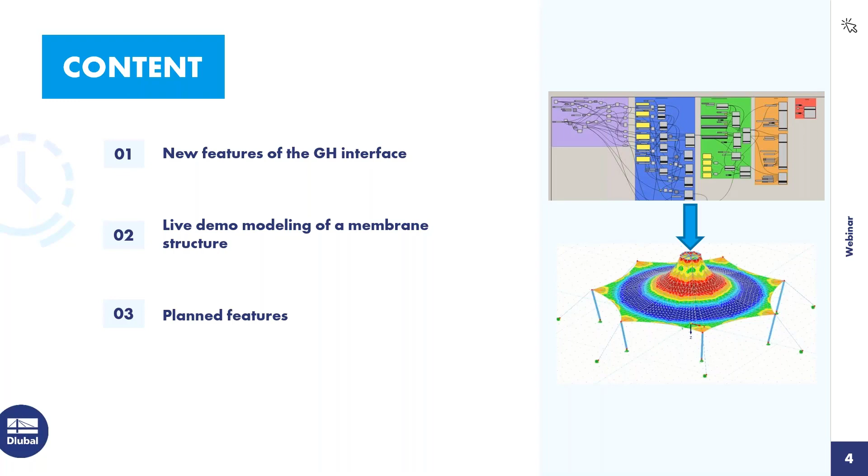All right, then let's switch into the first topic, the new features of the Grasshopper interface. Again, I listed them here in a PowerPoint. The first new feature is that we can create new cross-sections via the cross-section values. So we extended this component that you can see here on the picture with the information under more, so you can define a new cross-section now via the cross-section values.

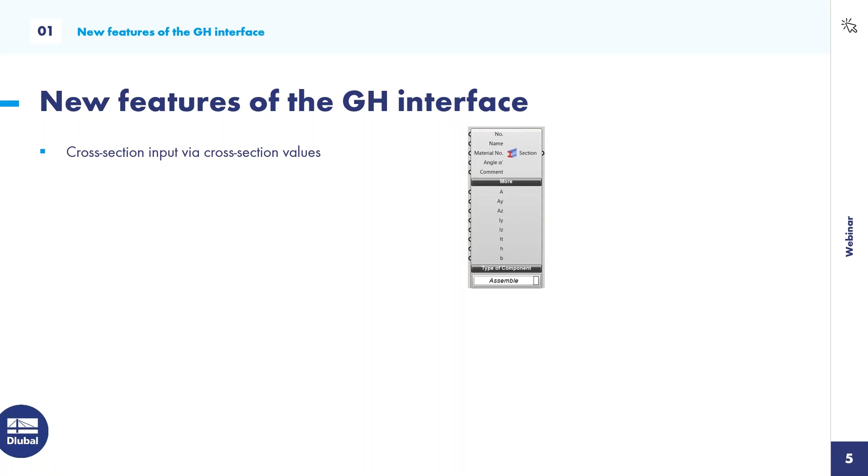The next thing that we optimized or implemented is non-linearities for node and line supports, as well as for member hinges. So now we can also control the non-linearities in these elements. Not all of them, I have to say. The diagram, the partial activity options, they have not been implemented here. They would require much more input options, and therefore we support now only the simple non-linearities.

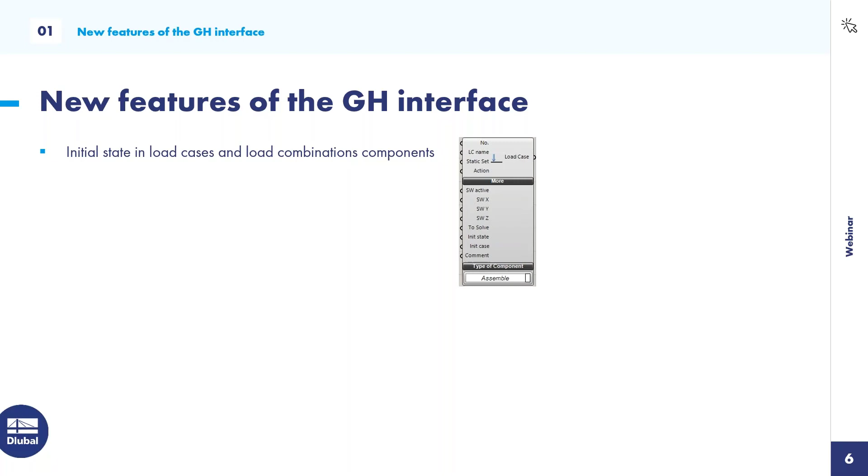We also have new components for line releases. As you can see, one component to create the type, let's say like a hinge, and then the main component, the line release component, where you can define which elements should be released and so on. Additionally, we have extended the load case and load combination component with the initial state setting. This is required for form finding related analysis, and we also extended the member load and surface load components with form finding related load inputs.

So far regarding the latest developed features. I will give you now a live demo of this interface or of this add-in. The focus should be, again, showing the logic that we implemented here and also showing the new features, especially form finding related features.

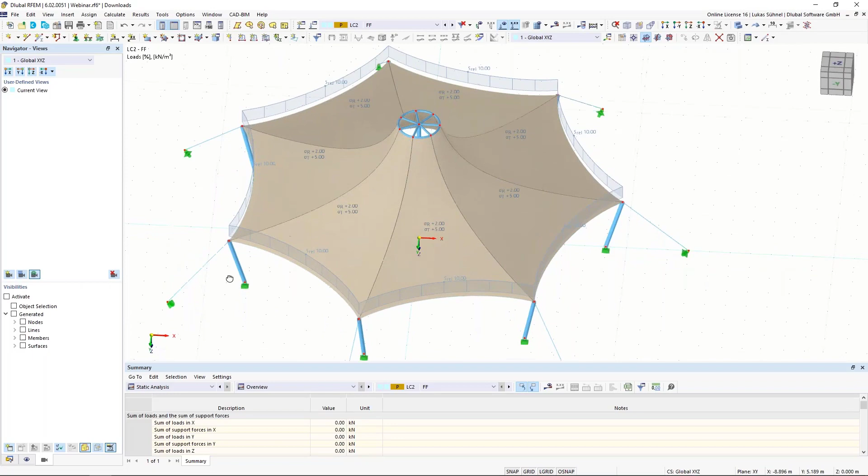Regarding the structure that I will model during this webinar, I prepared it already here. As you can see, it is like a tent structure. Membranes are used for the roof and some inclined columns, some tension members. We have, of course, cables here as a boundary for the membranes, a center column, and then also some loads, form finding related loads, but also, for example, snow loads to have a proper, let's say, load combination afterwards. Okay, so this is the structure that I will model. In Grasshopper itself, it will look like this.

This is the whole algorithm. I have my Grasshopper geometry on the left, which I will not show today. So this is something I will have predefined. I skipped this part here. What I will show is the connection to Dlubal, to RFEM, basically using the Dlubal components.

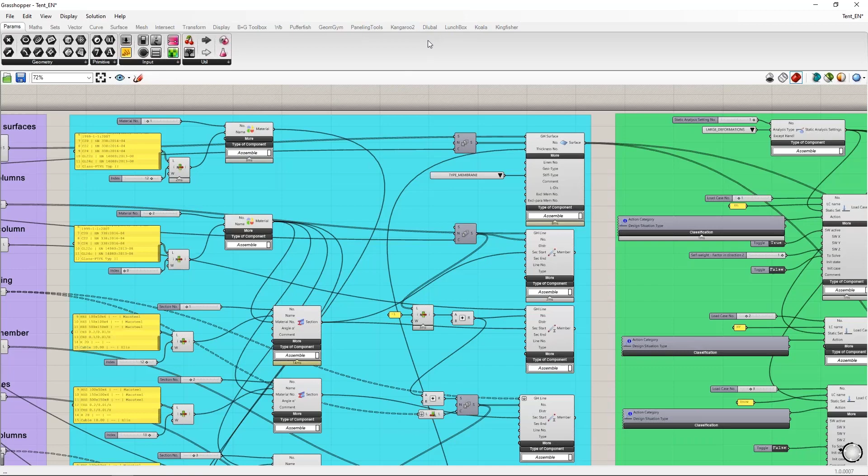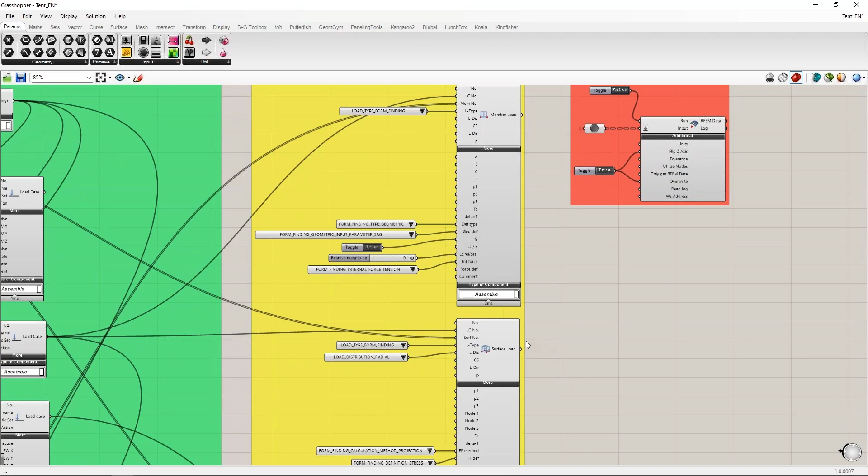So it is divided between model data, where I define materials, sections, members, surfaces, supports, and so on. Then the next chapter, load cases and load combinations. Then we have the third chapter, the loads, of course just exemplary, not extensively, just a couple of loads. And finally, the export to RFEM.

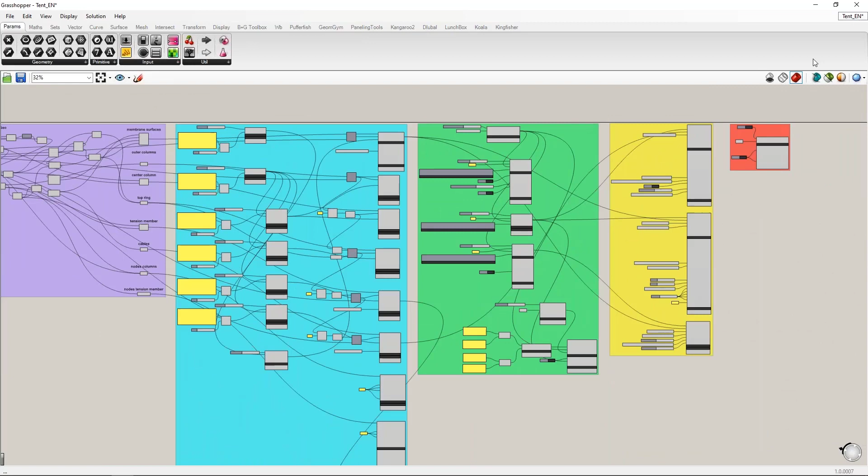All right. This is the final algorithm. I will start with this one here, as I said, where I have only the Grasshopper geometry predefined. I can also show what I have here, really quickly. You can see Rhino on the left-hand side, Grasshopper on the right-hand side. And as usual, you define parameters in Grasshopper to quickly modify the structure.

I have some parameters here for the height of the center column, for example, or the height of the outer columns. The inclination can be modified. I can change the amount of columns to generate different shapes for my tent. The outer radius can be modified and so on. So you can imagine anything that can be parametric is parametric in that file. And so I have this here.

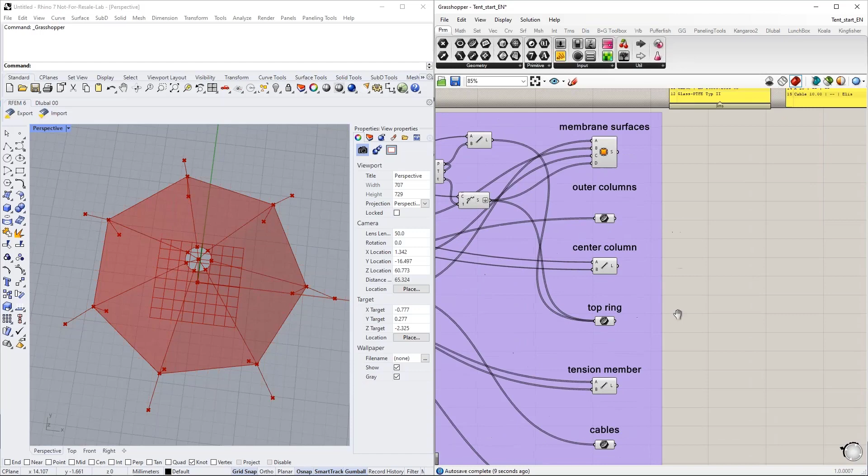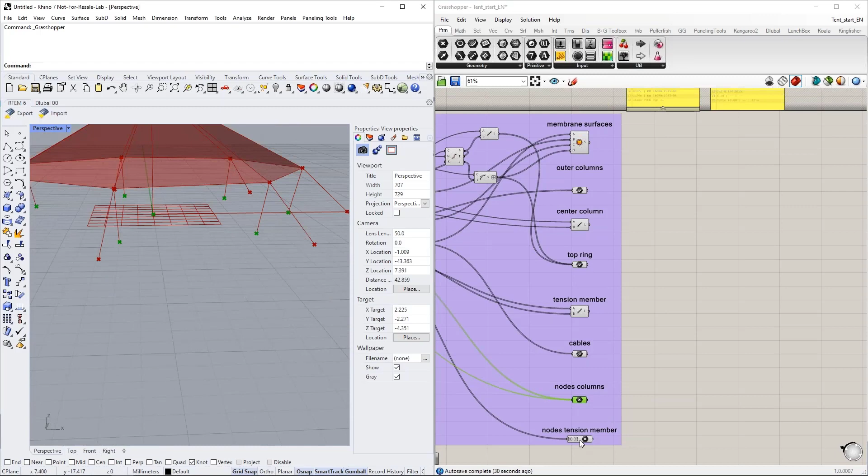And the outcome of this algorithm is, of course, surfaces and lines. Surfaces are these membranes. And then I have various lines for my columns, the center column, my top supporting ring here for the membrane, and so on. Tension members, cables, a collection of nodes for my columns, and another collection of nodes for my tension members. So this is what I have predefined.

And now the goal is to transfer these elements to RFEM and assign RFEM required properties to them. Now the question is, how do you begin with such a project? Well, I think it's good to take a look at RFEM in such a case. And I will take a look here at the data navigator. In the data navigator, you have like a red line for your project.

You have the basic objects. These basic objects are materials, sections, thicknesses, and so on. So these are the first things that you need to define in an RFEM project if you want to model a structure. And then you can continue with members and surfaces, later on also load cases and loads. The same steps I have to do in Grasshopper. So I will start in my algorithm with the materials, then the sections, thicknesses, and so on.

And to do so, I can call up the Dlubal menu in Grasshopper. This will show up when you install the plugin. And then you have these 3 categories: the model data category, load category, and the export/import category with the functions. In the model data chapter, you have here a component for the materials, and you simply define the inputs and you get the material as an output.

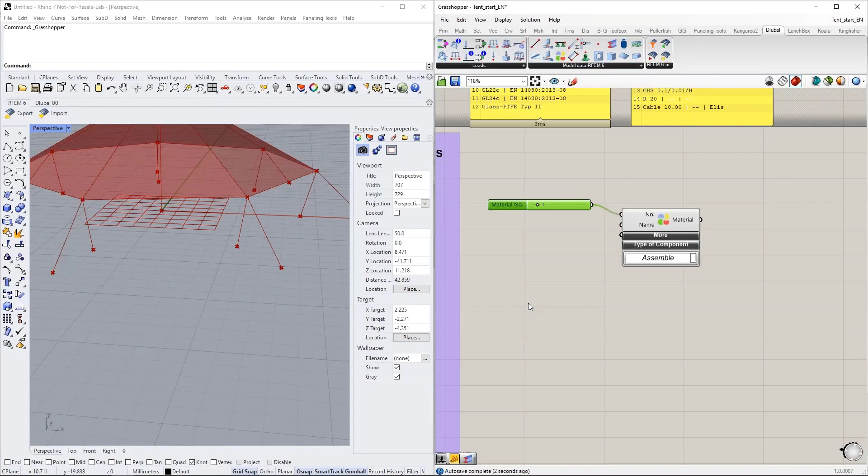I have 2 inputs here now. The numbering could be defined, so the index number of the material, and the name. The index number we have in all components. This is the number of your material in RFEM afterwards, 1, 2, 3, and so on. So you can and you should assign it. Why, I will explain later.

Regarding the name, the material can only be created if you use the exact name in Grasshopper, so that RFEM knows which material you want to assign. As an example, you could say, I want to create an S235. But the name is not clear for RFEM. It will work, it will create an S235, but we have the same steel grade for, let's say, 10 different standards. For the Eurocode with the German annex, maybe the Netherlands annex, and so on. And therefore you should be very clear regarding the name.

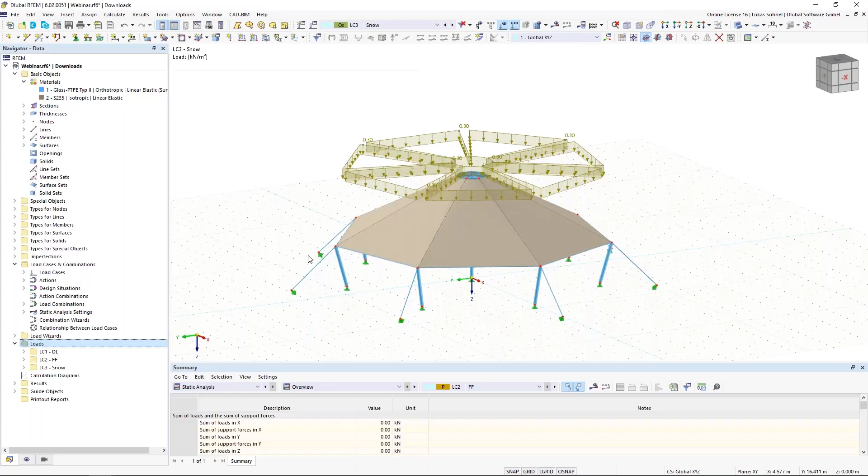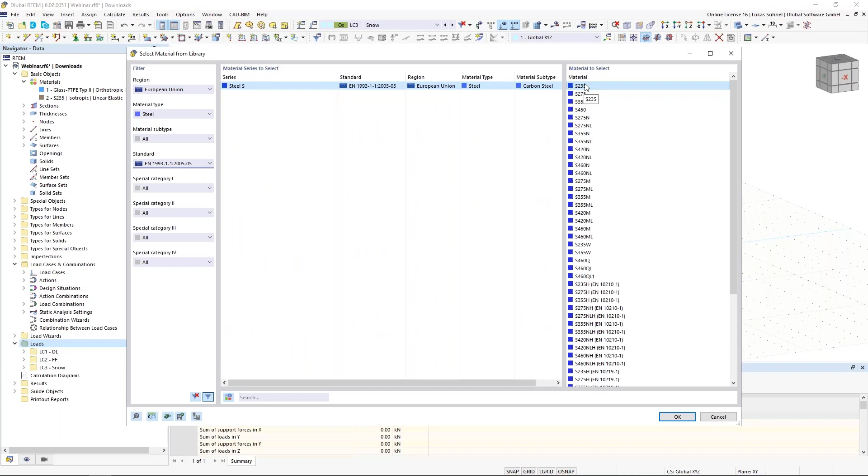You get the exact name at the moment if you go into RFEM and call up the conversion tables, and then you can search for your material in these tables. For example, European Union steel, and then according to EN 1993-1-1, the typical S235 for design according to the Eurocode. And this name here would be the full name that you ideally use in Grasshopper.

Now it seems to be a bit of work, and I agree, but the work theoretically only needs to be done one time. You save it in a list, a panel, and you can copy this component into all your projects.

You can extend it whenever you need an additional material, and then you have your own small library in Grasshopper. And this is what I will use in my project here. I will use this list again and again, and inside this list I have all my materials that I need.

How can I select one item of this list? Well, we have the list item component. I'm connecting this list to this list item component, and with the index I can pick one item from this list. I will create a small number slider from 0 to 15. And the first material that I want to assign is this glass PTFE material. It's a membrane related material. So I use here the index number 12.

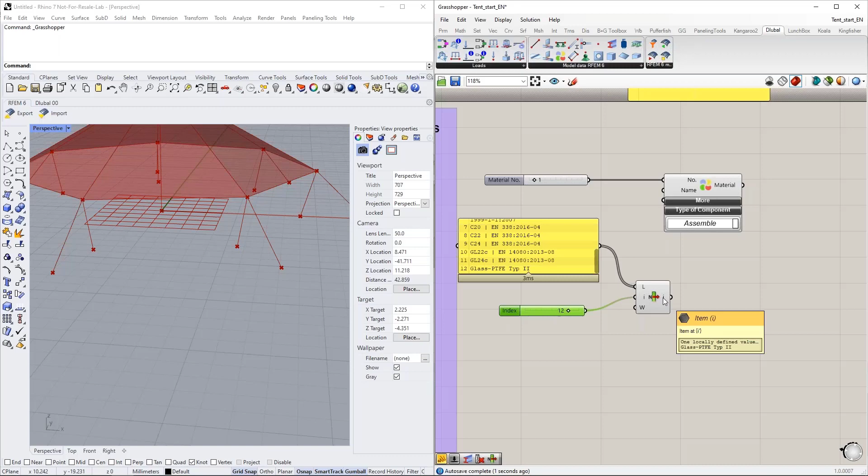So this component outputs this material, and I can assign the name to my material component. This is all I need to do. I can copy this whole thing because I want to create one more material, an S235. So I use here the index 0, and I'm already done.

Now, the next step would be the generation of my cross sections. Therefore, we have also a component here, this section component, and it follows a similar logic. I have to assign a number to this profile. I'm using the slider again. I have to assign a name. Same logic as for materials. You can use the conversion tables in RFEM to get the full name of the cross section, and then you can copy it or save it in such a list. It's the same. This is what I will do again.

Copy paste the elements that I used before, connect them again, and then just select the cross section from that list that I want. For example, cross section number 12. It's a circular hollow section. So this is the name of the cross section, and then the next input would be the material number. I'm highlighting here the number because it's not intended to write down the name again in here. You have to assign the index number of the material.

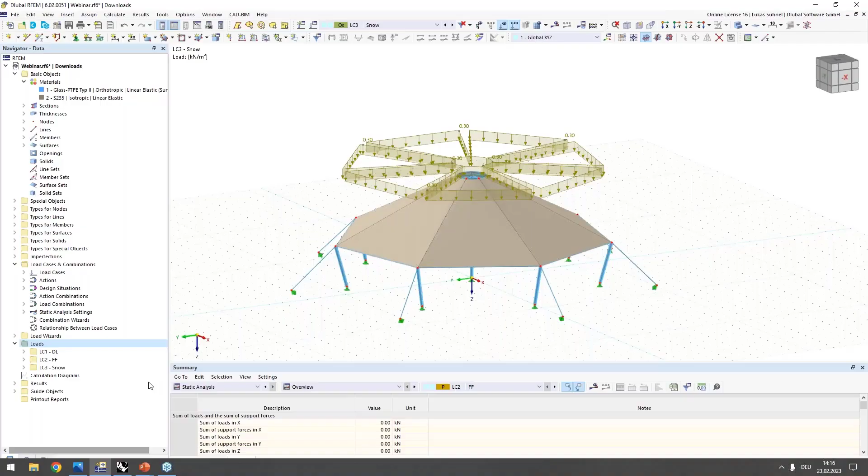And what would be the alternative way? If you do not assign the index numbers, you theoretically would have to run one export where you export the materials to RFEM. Then you can check in RFEM what is material 1, what is material 2, and so on. And then you know the ID numbers, and then you could use a number slider and assign the number to your cross section. But this is not the ideal logic. The ideal logic is assigning the IDs beforehand.

Okay. So far regarding that logic. I will create just a couple more cross sections because we have 4 different ones in here. The second one is cross section number 13 from that list. It's also a hollow cross section, but with different dimensions. I'm increasing the index number, of course. This is important. We cannot import different sections with the same index number.

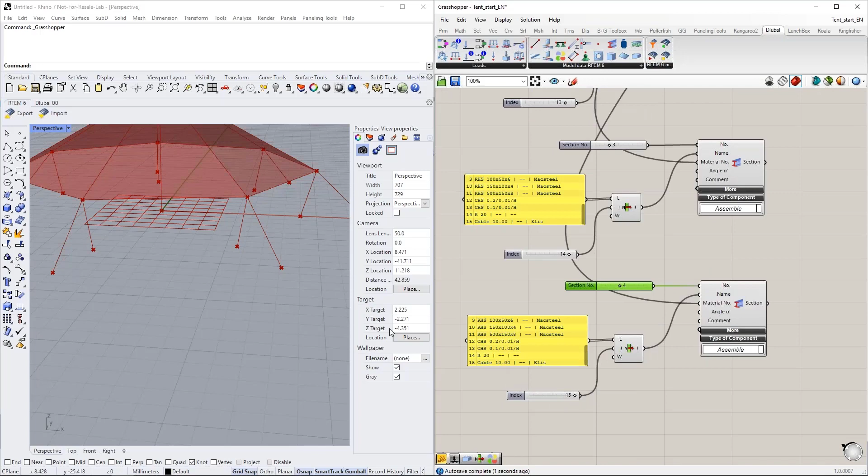Then I will create an R20 cross section. This is for my tension members. And then one more cross section, number 4. And this is number 15. This is a cable cross section for the boundary of my membranes. Okay, that's all regarding the cross sections.

The next step is the definition of a thickness, the thickness I need for my membranes. A surface needs to have a thickness assigned to it. This is the new RFEM 6 logic, and therefore I'm creating a thickness here with this component. Quite easy to use. Copy paste the index number, using it again, and then the material number. This is then material number 1, the PTFE material, and there's one speciality.

Usually you always have to define a thickness in these components, because if you have a concrete thickness, you have to define, is it 100 millimeter thickness, is it 300 millimeter. In this specific case, I do not have to assign a thickness simply because this material, glass PTFE type 2, has a predefined thickness attached to it. It is 1 millimeter thick. And therefore I don't have to insert anything in here. Okay.

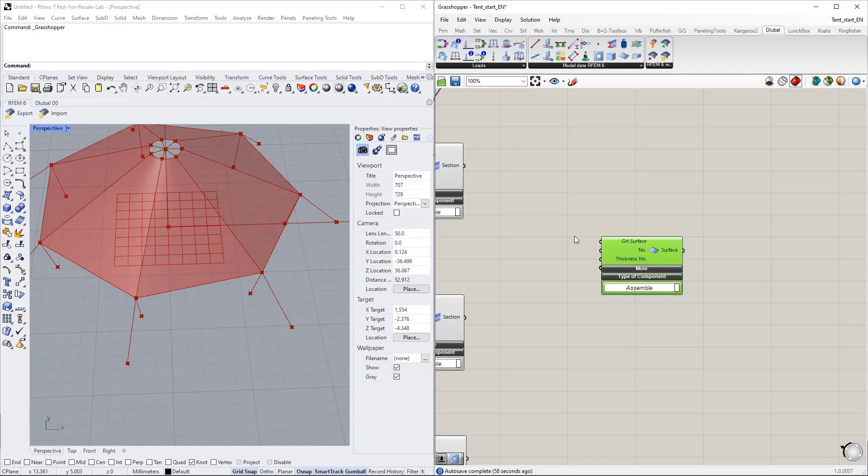So that's all regarding, let's say, these very basic components. Now we can continue with the surfaces and the members. For the surfaces, of course, we have a surface component. It requires the Grasshopper surface input, or here we should assign the Grasshopper surfaces to it. So I'm moving the component to my predefined algorithm. Here I have 7 untrimmed surfaces inside of it, and this is what I will use. So the geometry is based on the Grasshopper geometry, of course.

Then regarding the thickness, I link my thickness that I just created to this input. And then the remaining thing that I have to do is assign the numbers. Now, of course, it is possible to assign 7 index numbers to 7 surfaces. I could create, let's say, a simple list. Oops, like this, multiline data. And then I would have 7 index numbers for 7 surfaces.

This, however, works only as long as I have 7 surfaces. And as soon as I would modify my parameters here, you can see this is then, let's say, 10 surfaces and not 7 anymore. And then my list does not work. So I create, let's say, a bit more advanced list using the series component.

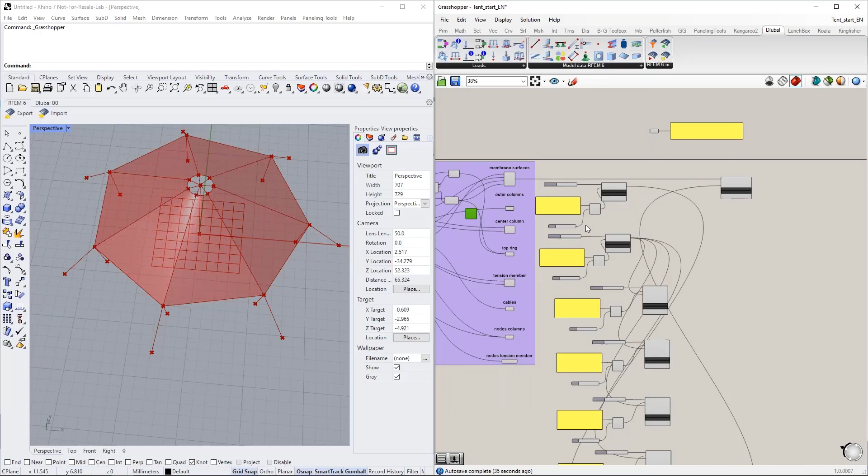And the series component should start with the index number 1. It has a step of 1, so the next number would be 2, and the amount of values is then connected to this parameter that I just showed here in the beginning, to the amount of columns, or basically also the amount of surfaces. And then this component generates always the same amount of index numbers as I have surfaces. And that's it. And then I don't have to care about the index numbers anymore.

Regarding the surface, one more setting is required. We have to modify the stiffness type for the surface. It is a membrane and not a, let's say, regular standard surface with bending stiffness. Yeah, it's a membrane. And we can assign such specific settings using value lists. Usually, in this small info box, you can also see what kind of input is required. It's an empty integer parameter, but you can see in my description, actually it can be controlled via a value list. So I'm using the value list.

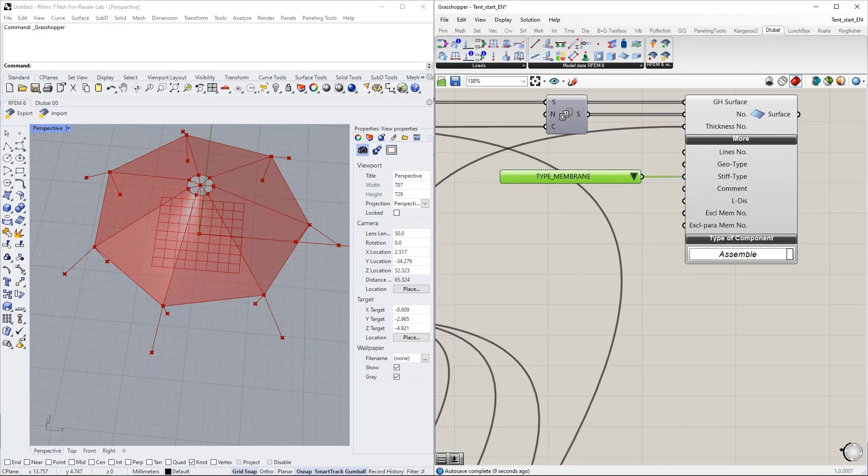I connect it to the stiffness type, and then I can choose the settings that you probably know from RFEM. In my case, type membrane. All right, these are my surfaces or my membranes, and I continue with my beams. For the beams, I have a member component. It follows the same logic. I will start with my outer columns. So these are the lines that are the defined geometry of my columns.

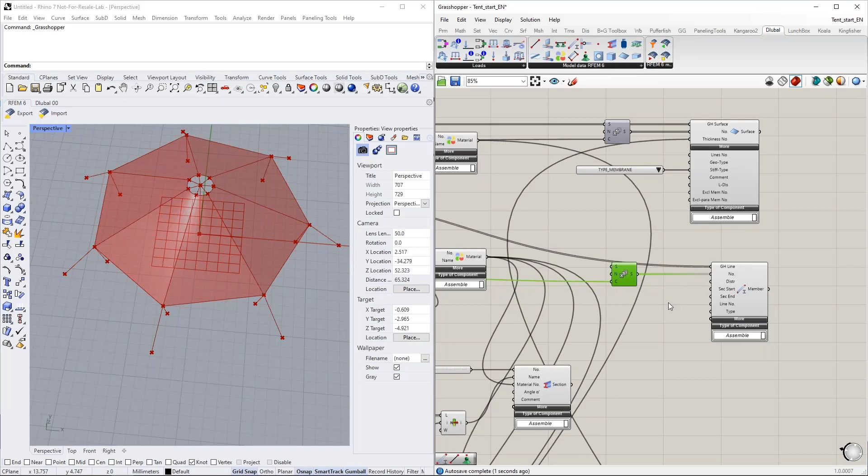The numbering is identical to my surfaces. I can use the same component. I have 7 lines here, so I need 7 IDs. And for the cross section, I can use the cross section type 1. And that's all I have to define here for this first set of members. Then I create another member component. Let's see if I can fit everything on the screen.

Maybe like this. So the center column, this is a specific component. I want to control it specifically here. So I have an additional member component. And the cross section is the same. What's different is, of course, the numbering. I also have to assign a number. I do want to assign a number to this beam, but of course it depends a bit on the numbering that I have before here.

I already have the index numbers 1 to 7, so I could give it the number 8, but if I change the amount of columns and surfaces, this will not work. So my numbering has to depend on this list. So what I will do is the following. I will use a list item component. I connect the list of index numbers to this new component. I say -1 is my index that I'm looking for, which means this is the last item from this list.

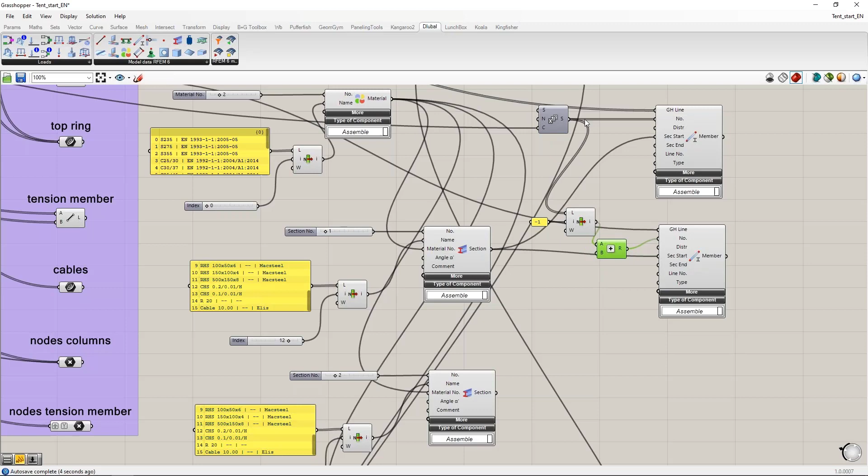Yeah, the 7. And then I simply add 1 to this number. And now I have here the index number 8. And whenever I increase the amount of columns, this number will of course be increased +1. So this is my, let's say, little bit of logic that I implemented here into this numbering. And therefore I'm good for any other modification of the structure.

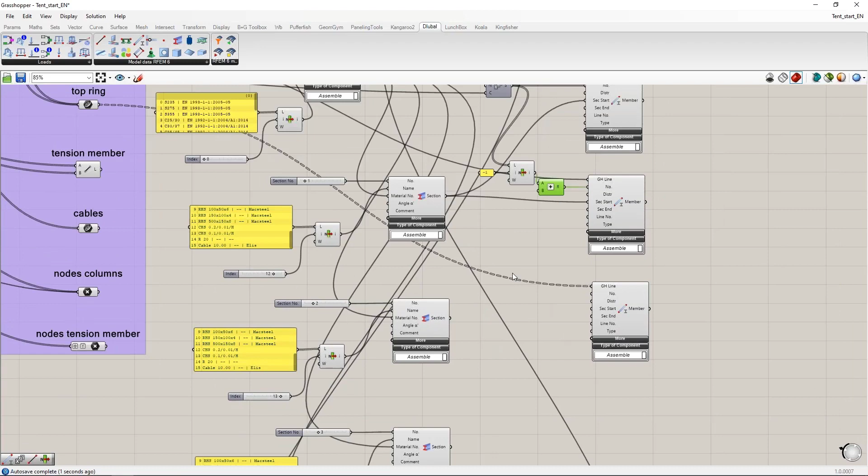Now, one more member component. I have here the center, the top ring. And for this, I use the section number 2. And for the numbering, I, let's say, use a similar approach. I create a series again, because I have here multiple lines incoming, 14 lines. So I need 14 additional index numbers. The start point is not 0 or 1. It is again based on this value. So 8 is my last index, +1.

9 would then be the starting point for my new series. And this series depends, or the amount of index numbers depends now on the amount of lines inside that component. What I can do is I can use a

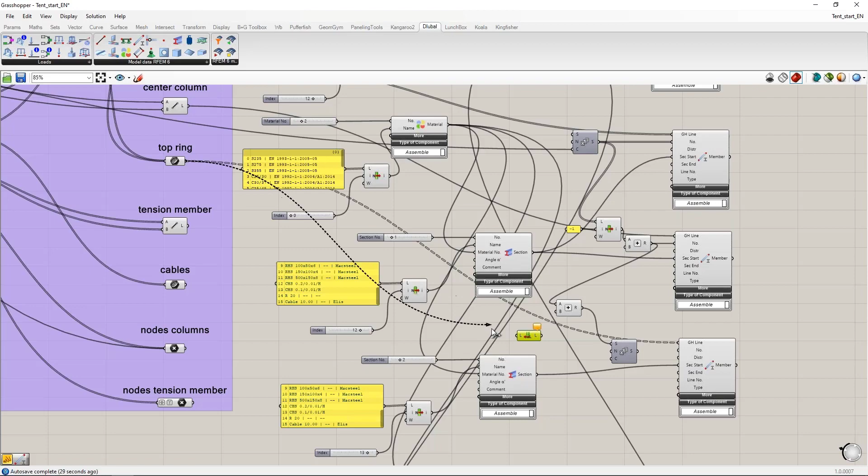list length component. This gives me the length of a list, and I can connect it to my top ring. Now my result is not, let's say, clear. I get here 2 values because the list, it's not actually a list that's incoming here. It's like a tree-like structure, yeah.

So I have to flatten the input first. Now I can see it's 14 values. So my last index is index number 14, and this is the amount of index numbers that I need for my lines. 14 lines, 14 index numbers. So this is also solved here.

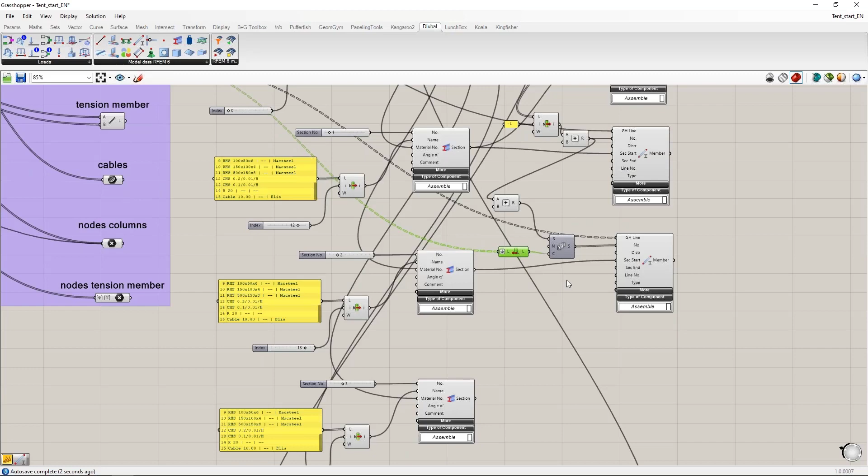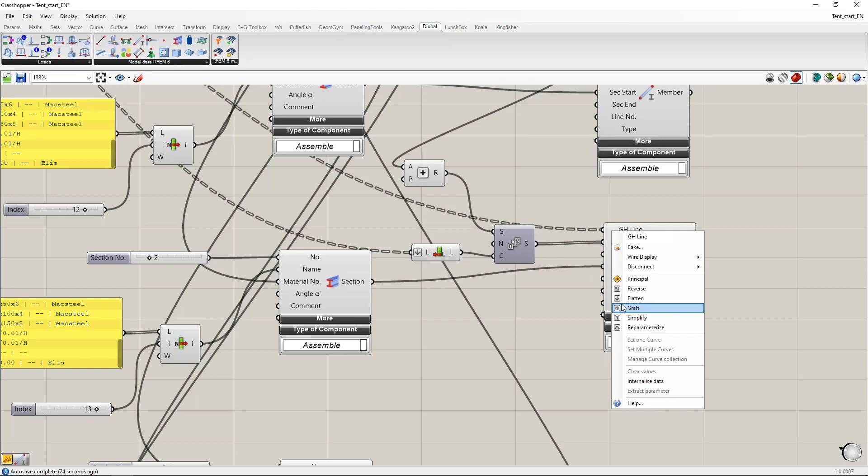Another thing I have to take care of is if I have here a tree-like input in this component, and here I have a list input. There is this Grasshopper logic with the combination of lists and tree-like structures and so on. So what I will do here is also flatten this input. Otherwise, I get multiple times the members.

All right, one more member component here. What else do we have? We have the tension members with the cross section for the tension members. The numbering is quite similar to what I used before. I will reuse these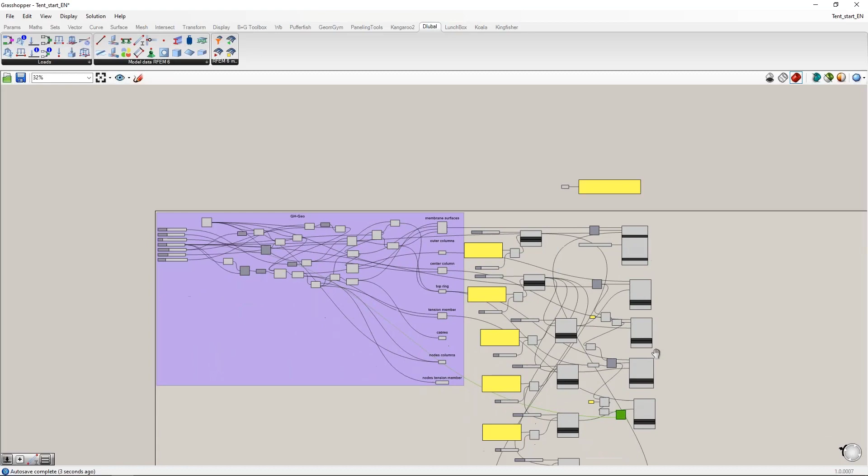components from the top. I'm taking the last index from this list, I add 1 to it, and then a new series component which starts with this index number, and it's again linked to the amount of columns because it's the same amount of tension members that I have in my structure. And now I have the correct amount of index numbers.

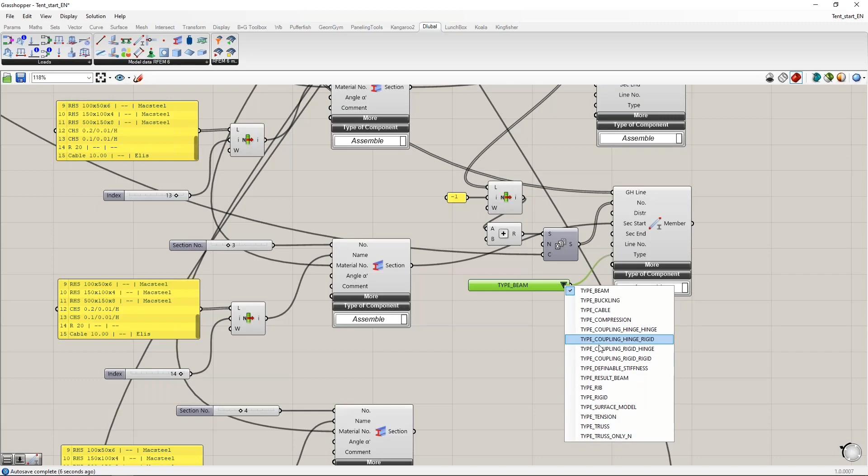The additional option that I define here is that these members should be tension members. So the member type can be modified with this component or with this input. I'm using a value list again, and I assign here type tension. Grasshopper line is linked correctly.

Okay, then I copy this whole algorithm and relink it. The series, so I will use the same procedure for my numbering. These lines should be now cable lines, and I also have to relink the Grasshopper line input. I want to use this component for my cables, so my cables are the input for this. The numbering is reassigned, and I have cables. So this is working, and now all my members are defined.

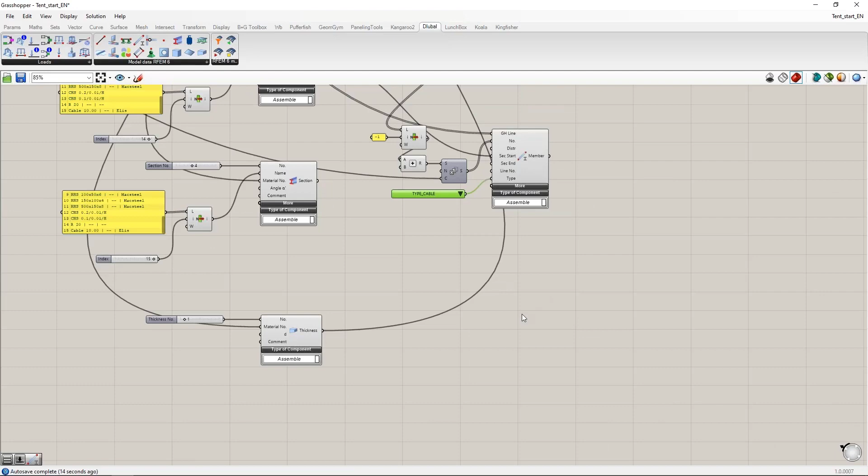In the next step, I want to define the nodal supports. They are of course also required. Again, I have a component for them. I have to link my Grasshopper nodes into this component. I have them here. Yeah, these are the nodes on the bottom of my columns.

And then I could assign an index number to it, but I don't need it. It's not important. I will not link this component to any other component except the export component. So the numbering will automatically be defined afterwards, and I don't care what the index number is, so I leave it empty.

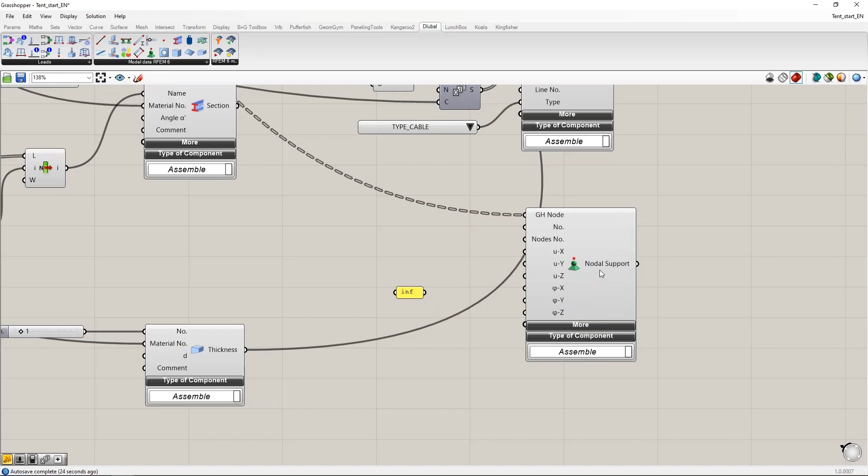Regarding the definition of the nodal support, we have here some - where is it written in? Yeah, it's written here also in this small info box. In case a support is free in a certain direction, you would enter the value 0. In case it is fixed, so it could not move in this direction, you use the string INF for infinity. And anything else is a value in Newton per meter.

So I will fix my supports in specific directions and also about the rotation, for the rotation about this global Z axis. Okay, so this is fine.

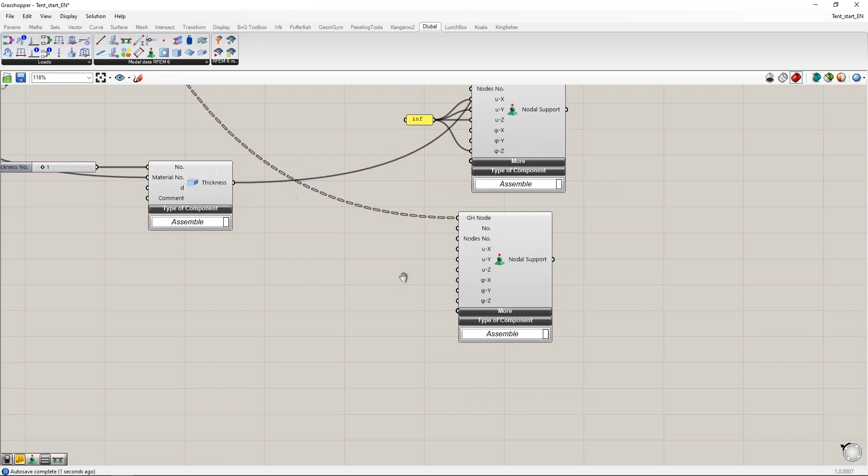And then I have one more set of nodal supports, and here I want to show a different option. My nodes are those nodes. And maybe to show it quickly here in Rhino - so the first set of nodes were for the column bases, for the bottom part of my columns.

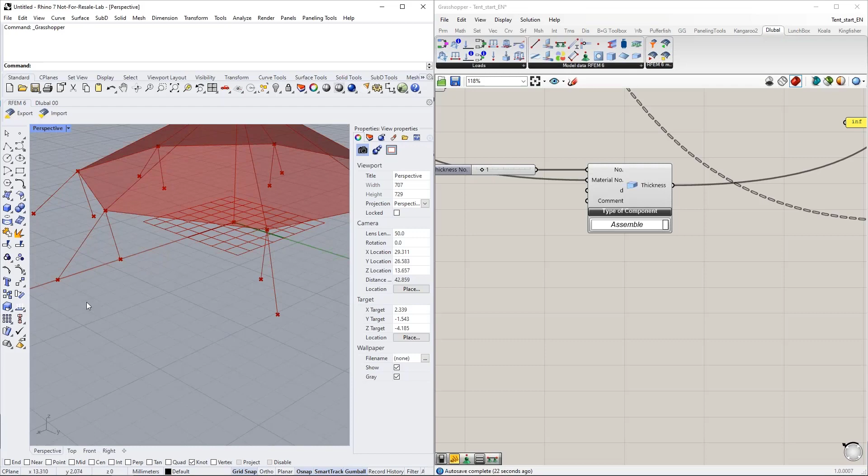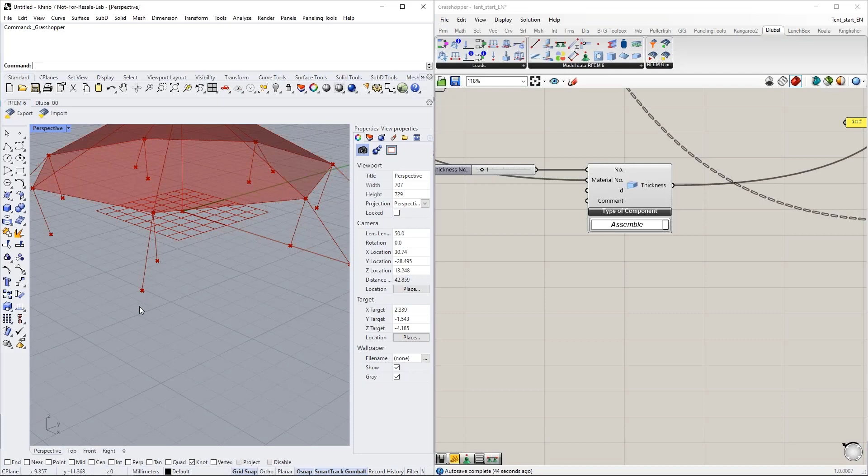And now I define also supports for my tension members, which are these inclined members here. And I want to rotate my nodal supports in a way that they always have at least one local axis directed in the same direction as the member is directed. So I want to have the support forces in one value and not spread over 3 different vectors. I think you know what I mean.

And therefore I need to rotate my support. Before I do so, I will support it properly. So in X, Y, and Z, it should be supported. And the rotation can then be controlled via the options under more. We have here these new options that I explained, or that I showed in the very beginning of this webinar.

Non-linearities for nodal supports, including friction values. And if I want to rotate a nodal support, I have to deal with some inputs, so let me show them in RFEM first so you understand why it is as it is.

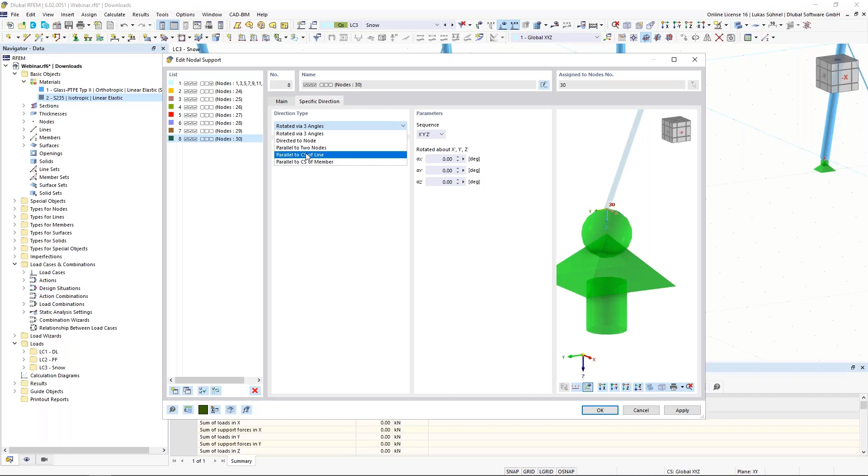If I modify such a support, you can see if I want to have it directed into a specific direction, I have to activate it here, set it active, and then define the type of rotation. Should it be directed to a node, or parallel to the coordinate system of a line or a member? And in case I use a member, I have to assign the member index number.

And the same logic we have in Grasshopper. So here is the direction type input, the specific direction input. This is a Boolean toggle, yes or no. Yes means I want to have it directed into a specific direction, the same check I have to set in RFEM. Then I have a value list for the direction type.

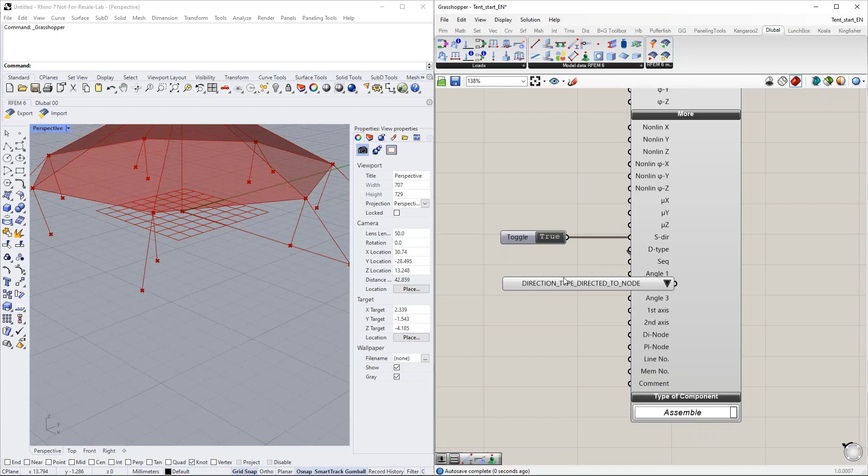Here I can define whether it should be directed to the node, or the same options I have in RFEM. And in case I want to direct it to a coordinate system of a member, I have to use the member number input to link it properly. For the member numbers, I can simply use the members I defined here. Because I assigned the index numbers, I can easily connect both elements, so the index numbers of the members will be transferred to this component, and then it's working fine.

Again, we have to be careful here with the tree-like data structure, so I will flatten this input. All right, so this is all I need to do to rotate a member, and now we are finished with this first topic. Let me quickly group it so it looks a bit better. Maybe like this. All right.

So what is the next step? The next step is the definition of load cases and combinations. For this, we have this group of elements here. I can easily create a new load case with this component. What do I have to define? I can assign an index number to my load case, the name if I want—it's optional—a static analysis setting, and the action category.

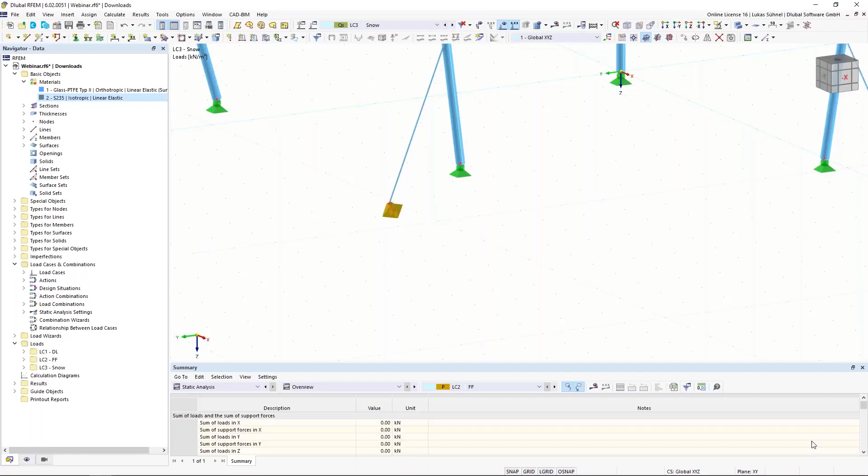The static analysis setting is maybe not so well known, but you use it every time you create a new load case. It's the setting for how the load case should be calculated: according to large deformation theory, third order, second order, or first order. This is the static analysis setting we define, and we have to define it also in Grasshopper, otherwise the load case does not know according to which theory it needs to be calculated afterwards.

So this is why I start with the static analysis setting—this is my first element that I usually define here. I assign an index number to it, and via the value list again—the value list is the component in this plugin—I can control whether it should be linear, second order, or large deformation analysis. Then I can simply assign it to this load case component. Again, the load case gets an index number so I can reuse it afterwards, for example for load combinations.

The name—well, we start with the dead loads—is optional, but anyway I assign it here. And then we only need the action category now. As a minimum requirement, the action category: is it a permanent load case, variable load case, like a live load, with different groups for Eurocode and so on. You can assign the action category using this load case classification component.

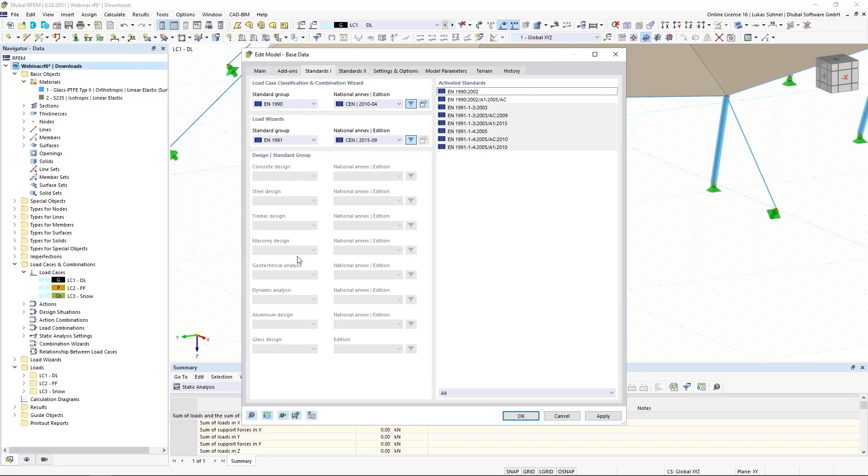This load case classification component is like a little library. You select the code that you're using in your RFEM project, and this code should be identical to the code defined here in the standard group, EN 1990. If you use a different code, you should also modify the RFEM standard in your file, otherwise it's not working.

And then you can choose from a list of action categories: is it permanent, is it pre-stress, is it imposed loads, and so on. In my case, it's a permanent load case, so I can connect my action category with this input, and then I'm done. It's generating the string expected in that input, which is quite a complex string, nothing you will remember—therefore we created this component.

What else do I have here as settings? I can activate the self-weight of my structure inside this component. I can say it should act in positive Z direction. As an additional setting, I do not want to solve this load case afterwards. I'm not interested in those results, only in the results of my load combinations. So I will simply deactivate it for the calculation. Saves a bit of time afterwards.

Okay, second load case, we have 3 in general, so it will not take much longer. I can copy here my index number list slider, then the load... oh sorry, wrong component, my bad. I want to create a different load case. This is what I want to do.

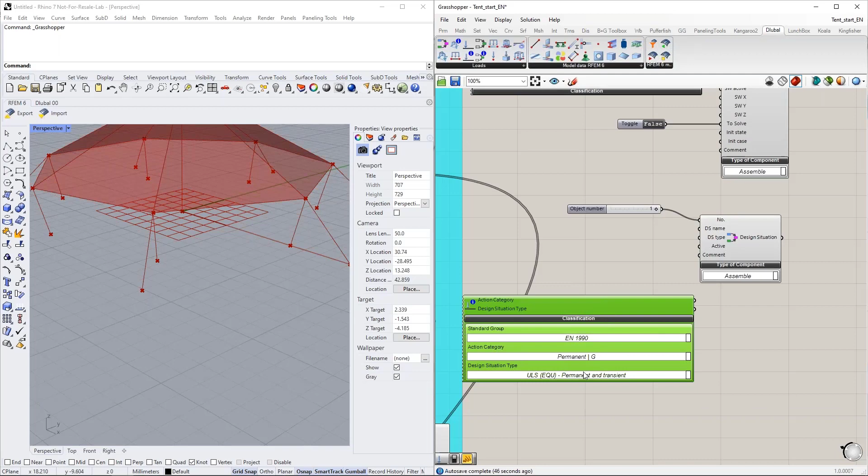And in theory, I would again use my load case classification component. I select my standard group here, and then I would select the design situation type, and I would get the correct string for my ultimate limit state design situation. But the library behind this component is in that case not correct. We will fix it hopefully soon. So I need a different way to get this name.

I have it here in my predefined component. I got the description by simply importing an existing design situation from RFEM into Grasshopper. So we have an import component, you can import data from RFEM into Grasshopper. You can then split this information up into these subcategories. And then you can also extract...

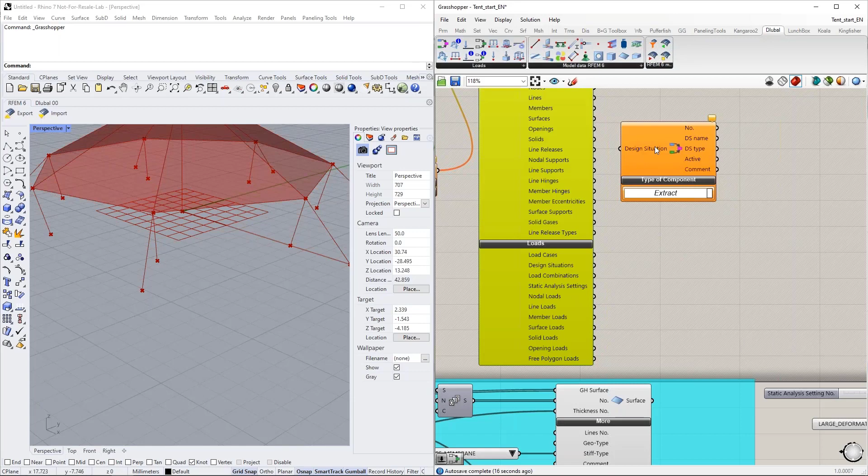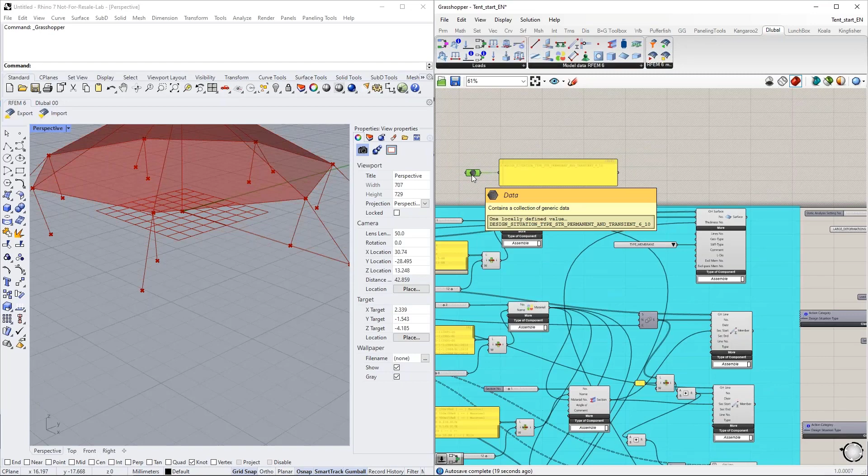Let me move this a bit away. You can then extract, let's say, the design situations by changing here from assemble to extract. And here you would get the design situation type string for the design situations that you defined here in RFEM 6. This is how I got this string, so it's easy to reproduce, and I will simply use it now. I will simply connect this small data component with the description inside to this component. So far regarding the design situation, it can easily be created.

And now I can define my load combinations. Again, we have here 2 components for that. We have the general load combination component. This has as theoretical input the index number, in that case it's optional. The combination name is also optional.

The items, this is what I get from this second component. So this is basically the combination of load case number and factor: load case number 1 with the factor 1.35, load case number 2 with the factor 1.5, for example for live loads, and so on. The static analysis setting number, well, we know where we get this from. And the design situation number, this is what we just created: design situation.

And now I have to define, or I have to specify my load combinations. Load combinations are always a combination of load cases. So I have to define the load case number and the factor for it. My first combination could be 1.35 multiplied by load case 1, the basic permanent load combination, let's say.

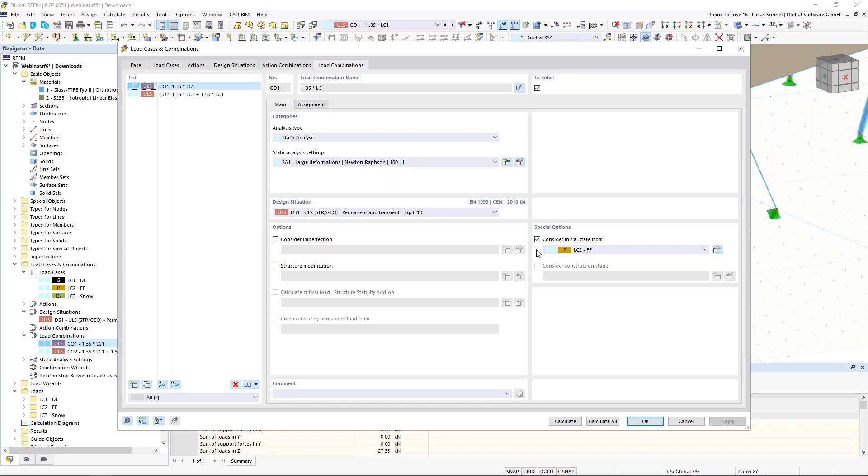And this is the same procedure that I use in Grasshopper. I activate this initial state using a Boolean toggle. I say yes, and then I define the load case. And now my load combinations are created. Well, as soon as I export them.

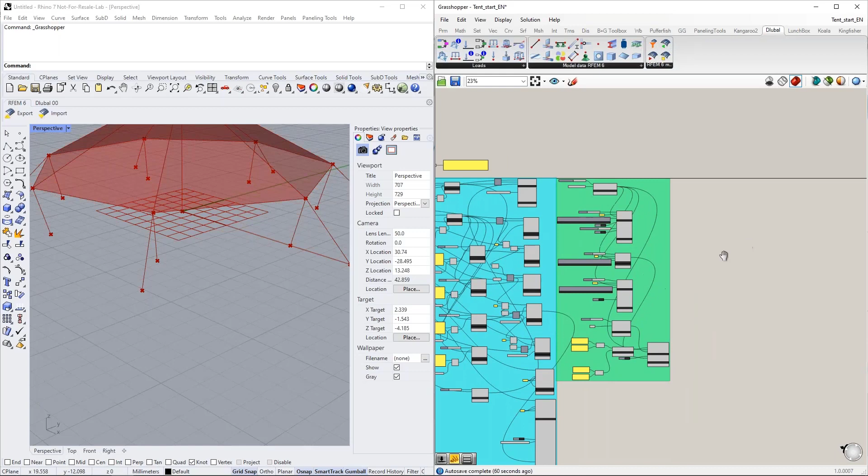Now the last topic is the loading topic. Let me quickly group this one as well. Color, any other color, green. And the last topic here will be the loads. Again, just 3 loads so that you see how it can be used. And my first load is a member load. I want to define the sag of my cables.

The cables are limiting my membranes here. They are basically the boundary lines of my membranes and between my columns, and they should have a predefined sag. They are not straight. It's not possible basically. They should have a certain sag, and this is what I can define using a member load.

And the member load can be defined as any other object that I used before. I could assign an index number. I don't need to. The index number will be assigned automatically during the export. And I don't care if it is number 1 or number 2, it's not important, so I leave it empty. The load case number is of course important. I have to assign in which load case this load should be placed, and it should be inside the form finding load case.

The members on which I want to assign this load, I also have to link into this component. So where is it? This load should act on my cable members. I have my cable members here, easily visible via this member type. And I can simply connect the member component with this member number input here.

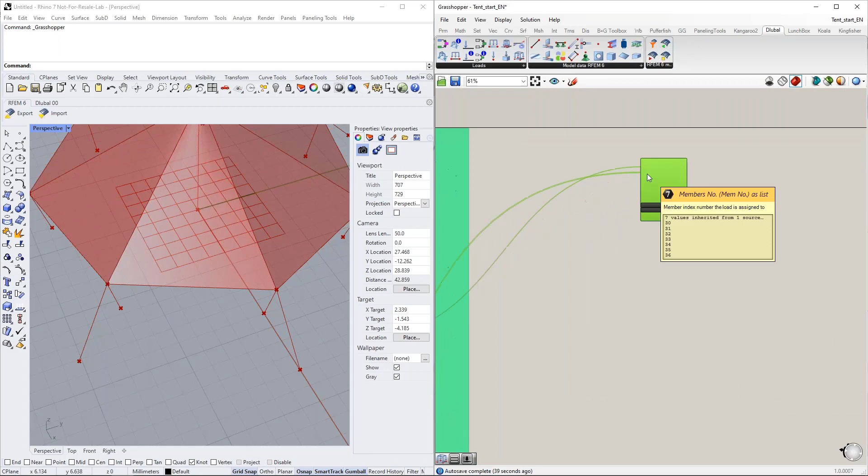Okay. So now I just have to define my load. Quite an easy task. Well, it is a simpler task. You select what kind of load you have via value lists, mostly via value lists.

It's a form finding load. It is a very specific load type. So the additional settings for this load can be found under more. It's not what we show as default value. Let's say for uniform member loads, you will only work with the upper part of this component. If it's getting more specific, you have to use the more option here, and it will show all the other ones.

And here I can use again the value list to define that it is a geometric form finding load; it is the definition of the sag of my cable. It should be defined relatively. We can define it absolutely or relatively. We can use a Boolean toggle to control this. Again, this information you can find inside the components. You can see in my small text there, Boolean toggle is the recommended input way.

And I say, yes, I want to have it in a relative input. And then here is the input for the magnitude. And it is 0.1. This means 10% in this case. And so I assign it like this. And it should be a tension related form finding load. We also have form finding for compression, this is also possible, form finding for structures under compression. In this case, I will, however, link it to my tension forces.

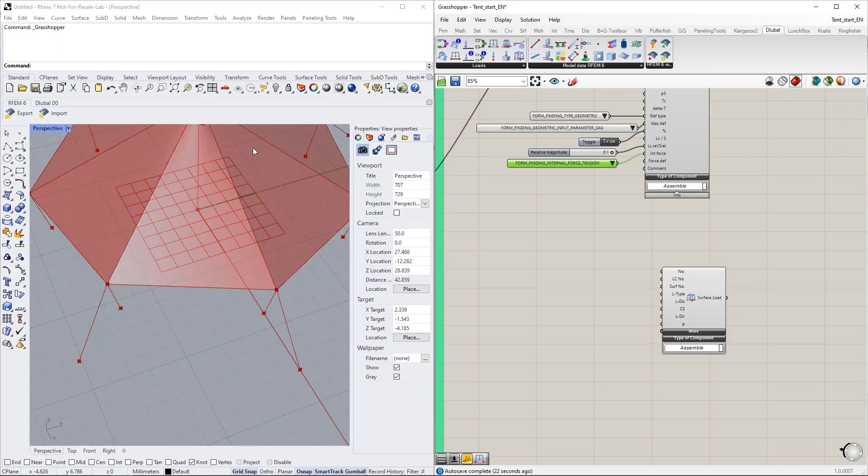Okay, so the first load is defined. I will create two more, surface load. This should control the pre-stress in my membranes. And to do so, I have to link it again to my load case number 2, to my surfaces that I defined here, because it's acting on all these surfaces. And then just use value lists and values again for the specification of this load. It is a form finding load. It is a radial definition.

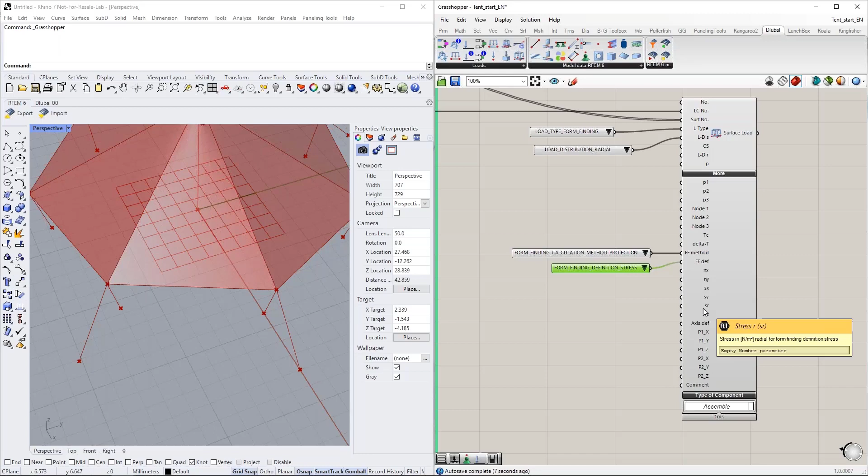And then under more, we find the settings for this load. Let's use another value list for form finding method. It is a projected form finding. And the definition is via the stresses and not via forces. And now I can enter the radial and the tangential stress for my surfaces. How does it work? So I want to assign a radial stress in my membranes and a tangential stress.

And in the past, we had to modify the local axis system of my surfaces. They had to be directed into a specific direction, one for radial, one for tangential. And then I was able to assign it. With this new load, it's not required any longer. I can simply say I have a rotation axis, let's say upwards, basically similar to my center column. And then the load knows, okay, tangential means this one, radial means this one.

So what I have to do now is, first of all, define the tangential and radial stress in Newton per square meter. So Newton, not kilonewton. This is what we expect here as SI units. And then for the axis, I have to define it. I can define it in two different ways. Well, actually, I implemented only one way.

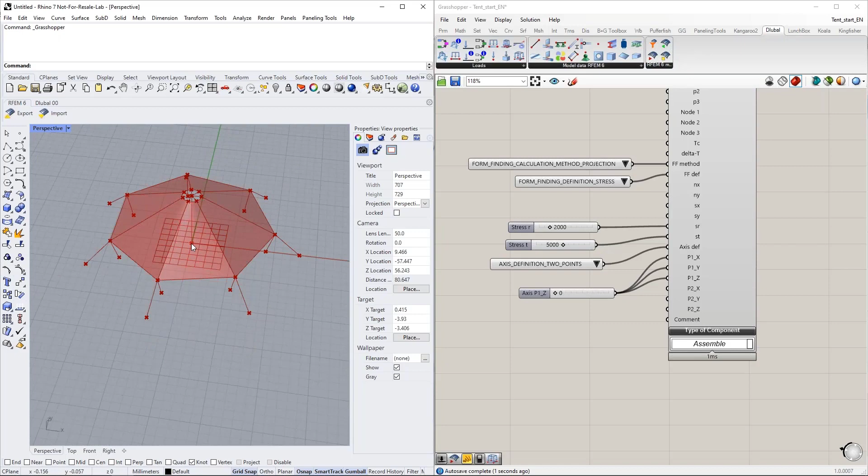We have the options point and axis or 2 points. And I minimize the input. I only support 2 points here. And then you can define these 2 points via these 6 coordinates. The first coordinate is basically 0, 0, 0. It's my base point. Then 0, 0, minus 7.5 for the second point of the axis. And this is how I define my axis. And then the structure will know what is radial, what is tangential. So this is my surface load. I hope, yeah, should be it.

And then one more simple load, a snow load on my membranes, just to have some proper loads on my structure. Load case number is now load case 3. Surface number, again, same surfaces. And it is a force, uniform, then in the global Z projected direction, global Z projected.

The coordinate system definition is a bit specific. You can see it in the description. If you want to refer to the global coordinate system, you should enter here the value 1. For your additional user-defined coordinate systems, you can then use 2, 3, and so on, the index number. In case you refer to the local coordinate system, you have to enter the string local. So it's not the same for local and global. You need different types of inputs, but it's working.

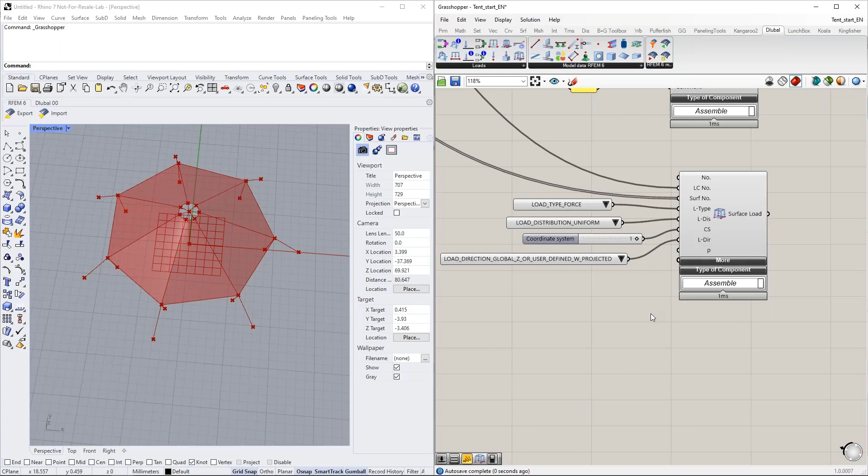And then the force is 0.3 kilonewton per square meter, so 300 Newton per square meter. And that's all I need to define for the surface load. All right, this is what I wanted to show for the loads. Quickly group it.

What do we have? Yellow. And then the final component is my export component. I can control the export via a Boolean toggle or a button. I like the Boolean toggle. It gives me 2 options. If I set it to true, it will run the export. Then usually I set it back to false.

But if I leave it as true, I do have something like a live link. Whenever I change something, it will run the export again, and RFEM will be updated. And with the button, I would only have one option. I can export it once. So I tend to use the Boolean toggle here.

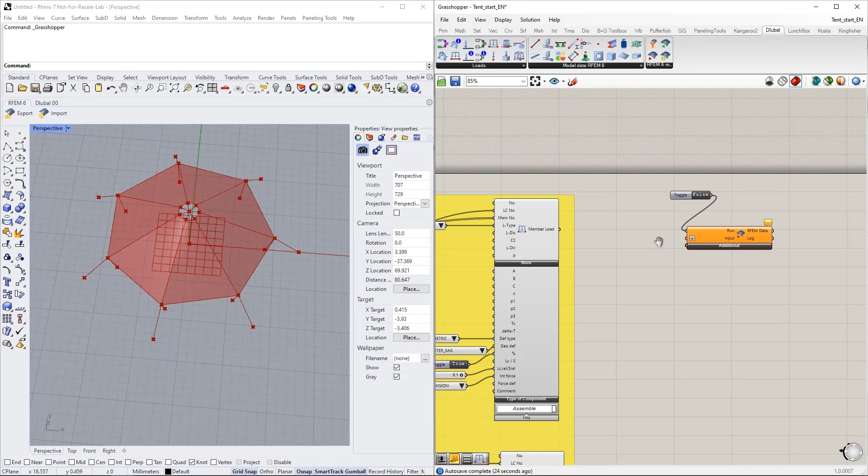The inputs, I have to combine all my components to the input. I will use a data component in advance, just to collect it. It is a bit of work. I will have to do it now. I'm sorry, but it takes maybe half a minute to connect everything, but it is required, and then we can run the export afterwards.

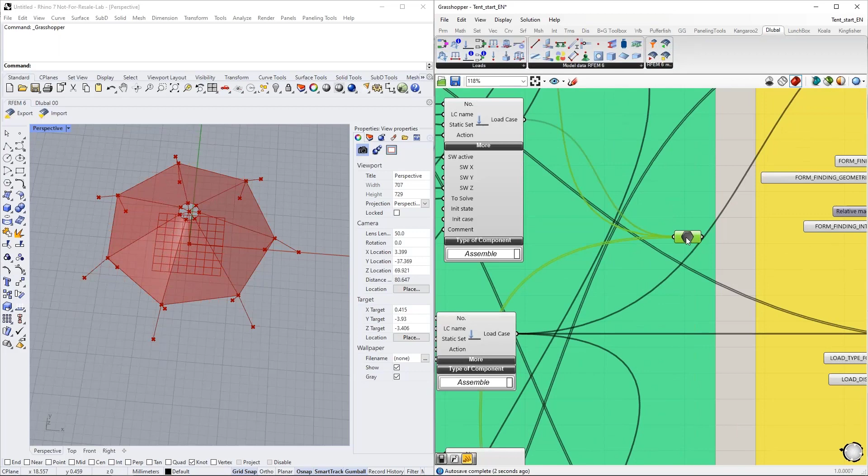So in the German webinar, I did this during the generation of my components. I always connected it directly to the small data component. Today I forgot about it, so I have to do it at the end. Okay, and now just these few remaining components. Static analysis setting, my load case. Oh, did I just? Oh, where is it? Oh, yeah, sorry. I somehow did not press Shift. So one more time.

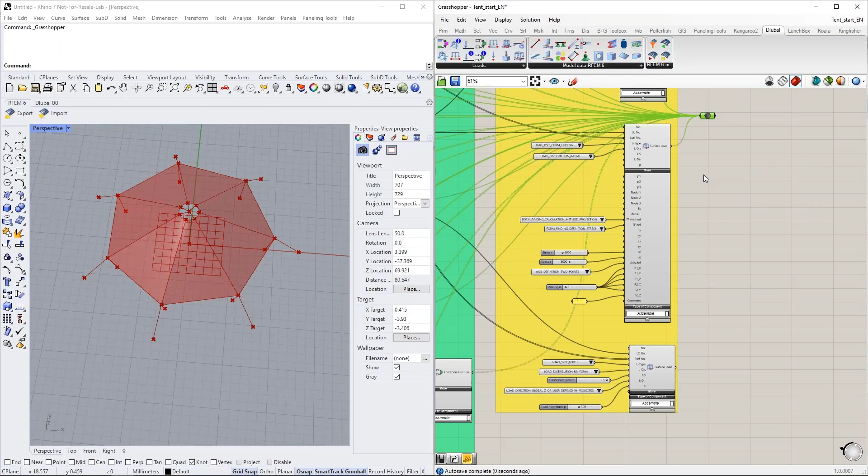So then I really hope I forgot no component. Otherwise, I will use my predefined algorithm and my second Grasshopper file that I have in the background, and we will be able to see the result. Okay, so I connect this to my input. Then regarding the export component, we have few settings here.

Maybe important for you, the unit definition. By default, we are using meters as units. So these coordinates in Grasshopper are by default meters for me. If you are using a different unit when you define these values, you can modify it using a simple value list, and then you have a selection of the units from Grasshopper and Rhino. Flip z-axis is required.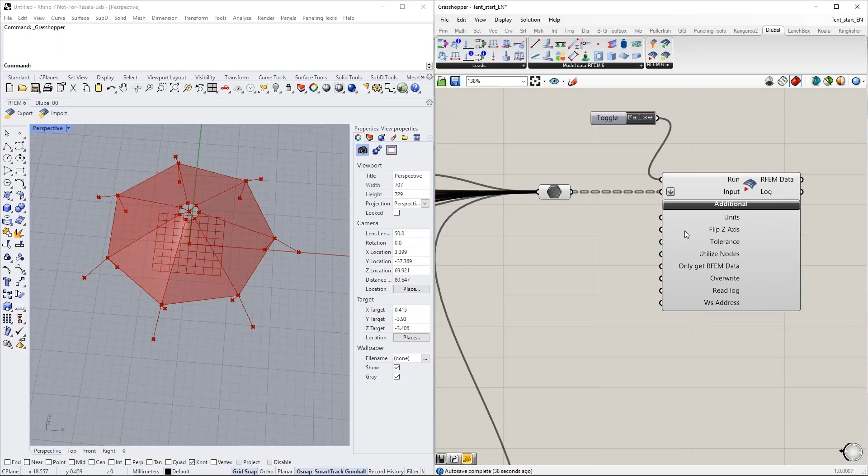I can control it via a Boolean toggle again. What does it do? It basically mirrors my structure in the XY plane. Here my z-axis goes upwards, as you can see. In my RFEM file, it's going downwards. So it should be flipped during the export. Tolerance is not so important.

Overwrite is an interesting option that you should think about. I usually always override my structures. So whenever I run an export, the RFEM structure will be overwritten. This is also what we had in RFEM 5 as logic. In RFEM 6, with this component, theoretically, you can also add data to your existing RFEM 6 structure.

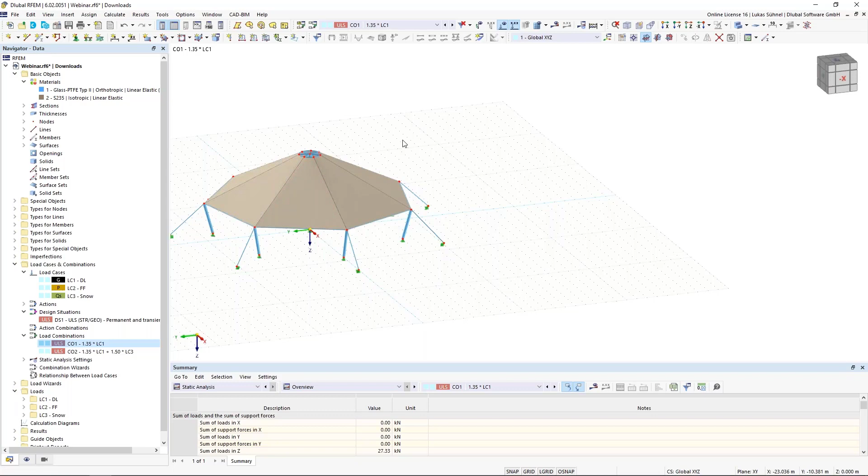So when you have a structure open like this, and let's say you model something else next to it, or you want to modify some elements here or add something onto it, it is possible. In this case, in Grasshopper, you would set this to false, or you basically do not modify it. I think per default it's false. I set it to true now because I want to override my structure.

So these are the main options that you need to know about, and then we can run the export. And yeah, I would say we do it. Let's put Grasshopper on the left, RFEM on the right, so we can see what's happening.

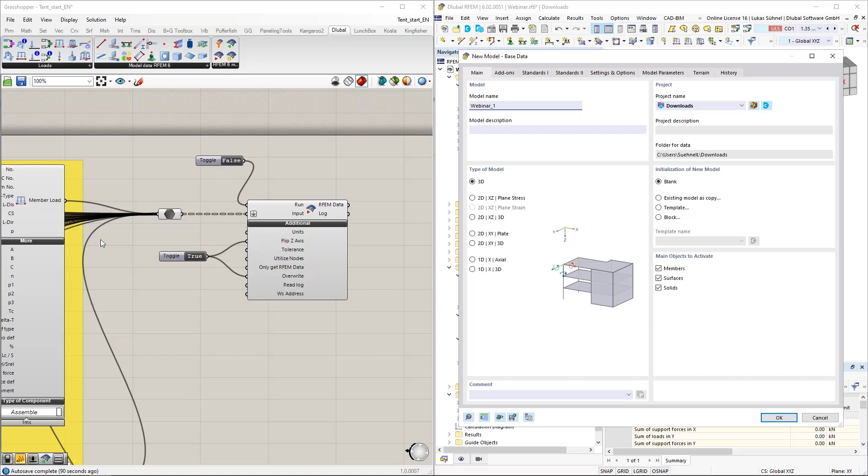One thing that we have to talk about regarding RFEM: when you run the export, you always need to have RFEM opened, of course, and you have to have a model open. We are not automatically creating new models in RFEM. It needs to be opened in advance. And in this specific case, I'm using form finding related functions, so I need to activate the form finding add-on. Otherwise, these options are not available in RFEM, and I will get an error for the export.

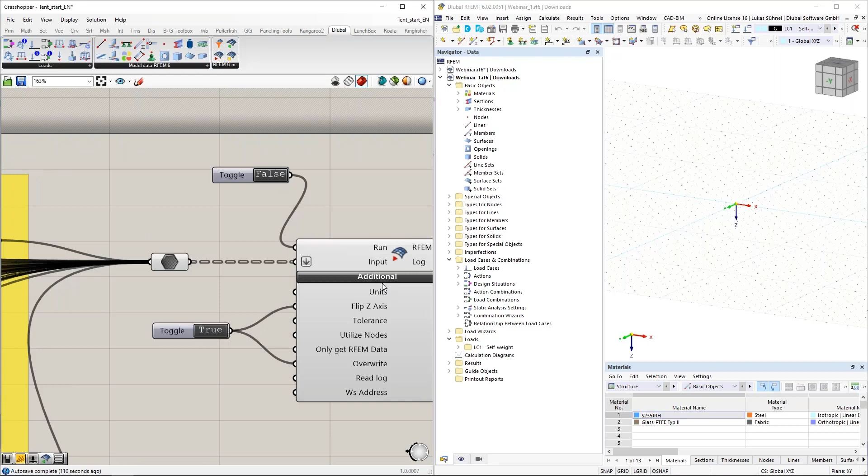So let's wait until this new file is opened. So this is my more or less empty file from RFEM, and I will run the export now and hope I made no mistake. Looking good so far. So you saw it, I set it directly back to false. So whenever I change something, it will not automatically run the export again.

What do we have here? We have this structure that we expected with the different cross sections, with the rotated nodal supports. Here you can see at least one axis of my nodal support, the local x-axis, I think, is always directed into the same direction of my tension member. So any forces that I have in my tension member will be in one value in my nodal support.

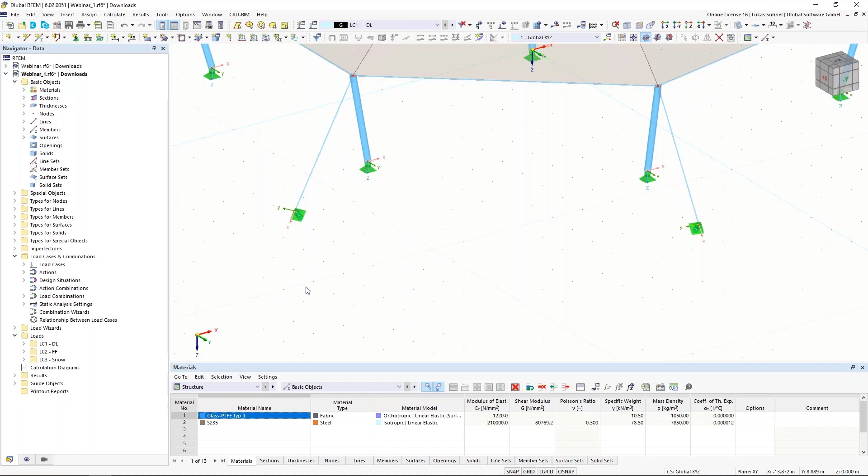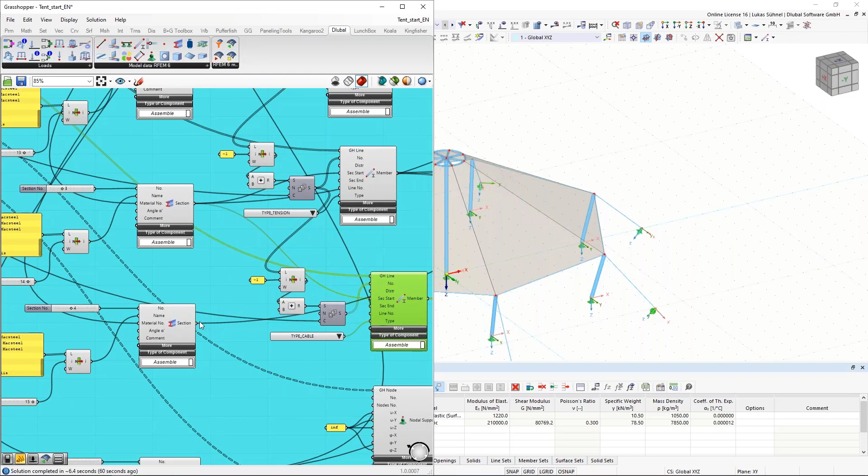What else should I show? Materials are defined, sections. Oh, my cable. No, my cable is not used. I guess I did not assign the cross section of the cables correctly. Let me see. The cross section. Yeah, it's still the cross section from my tension members. I want to use cross section number 4 from the cables. I will run the export again.

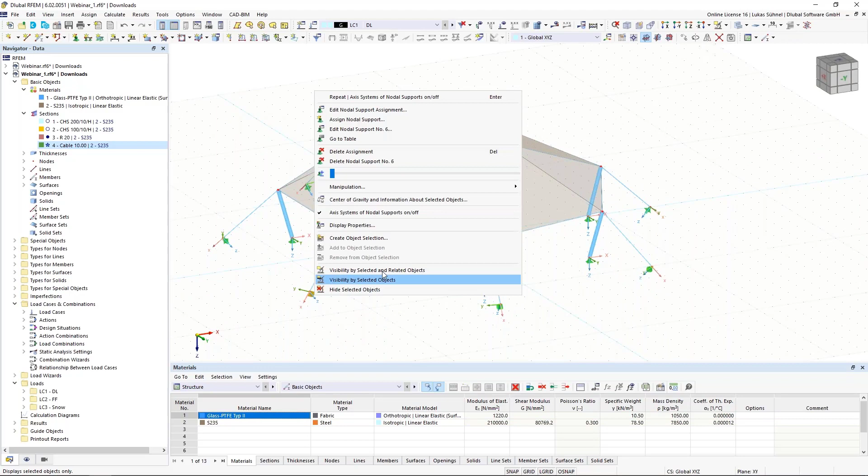Okay. And now, yeah, now it's correct. The cable section will be used for these cable members. Okay. I also have my thickness here. Glass PTFE 1 millimeter. Yeah, this thickness comes with the material. I didn't have to assign it.

And then I have all my load cases, my dead load case, form finding load case with the loads that I defined. Yeah, with the sag for my cables, and the pre-stress, the radial pre-stress for my membrane, and also my combination. So anything that I defined has been exported, and I can calculate the structure now.

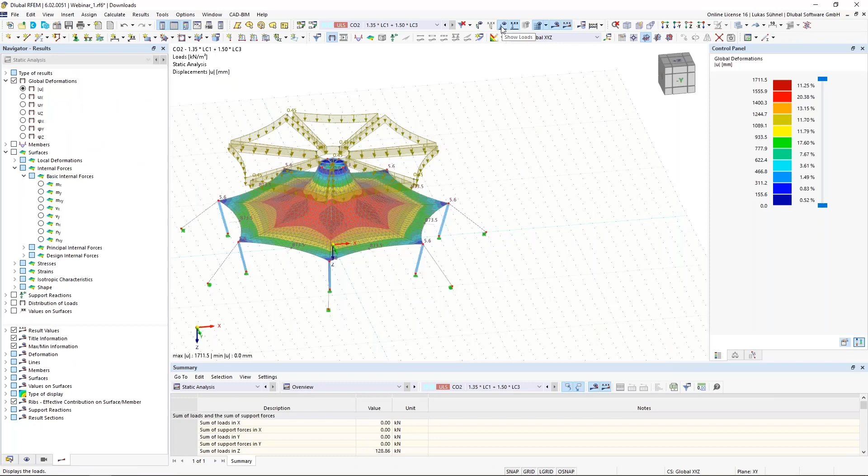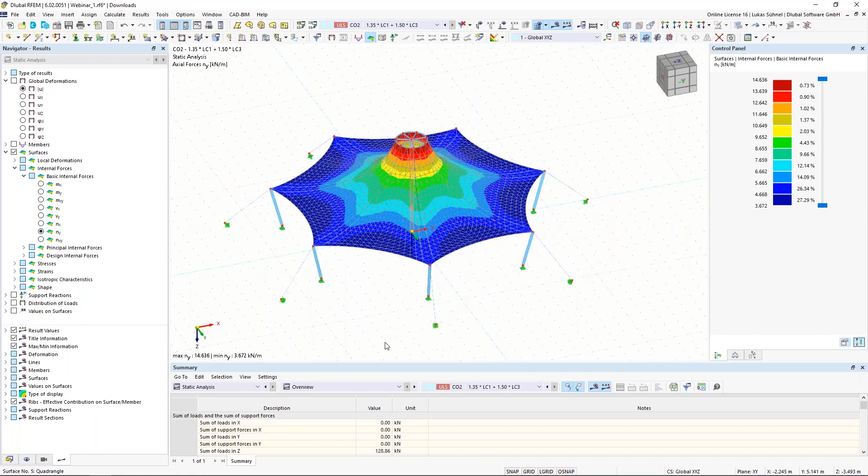The form finding load case, not the load case 1, not the load case 2, as you saw. I deselected them for the calculation, and then you get your results. You can analyze your membrane, the basic internal forces in, let's say, tangential and radial direction. Is there any compression, or is it completely under tension, as it is here and also here? So this is fine, and then you can continue designing your structure. You can use your steel design add-on now for the columns and so on.

All right. So far regarding this small live demonstration of the plugin, I hope that I was able to show the logic that we are using here, especially with the index numbers, but also how you can control your components. And the last thing that I want to mention now is what we have planned for the future. I listed a couple of ideas, and not just ideas, really things that we want to implement.

One big topic is, of course, the import of results from RFEM back into Grasshopper. Also, let's say the FE mesh as geometry, maybe. Another big feature is the import of members, including the cross-section outlines. Again, a bigger feature, which needs a bit of development on our side.

And then some smaller ones, let's say components to control the FE mesh settings or the start of the calculation, maybe an optimized input regarding rib members, or components for imperfections, as we cannot define them via the Grasshopper interface right now. It will probably take a bit more time to implement such features because I do need a programmer for them. It has to be programmed manually.

Other components, as the ones that I used today, such as member components like force components, I can basically generate. So whenever you are missing some specific input in here, or maybe an additional component for some input data, I can usually easily generate it. But specific options like import of results and so on, this is not a predefined function that we have. We have to program it manually.